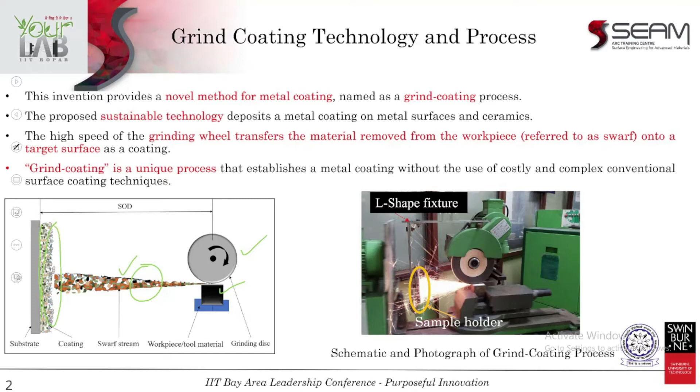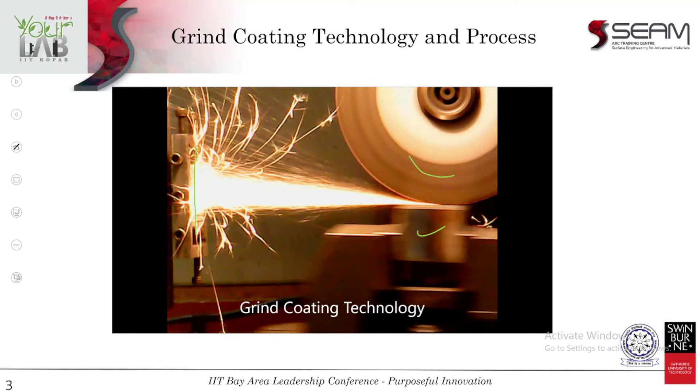So this is a small video about this invention, where the swarf particles are being generated which are then transferred at high velocity onto this surface as a coating. So this high velocity is provided by this wheel, and these particles which were earlier waste, now they are getting deposited as a coating.

Some salient points about this invention. This current invention or the process is very novel. No prior study on such a coating technique has been reported earlier. But if we see, the competitor is thermal spray technology. In thermal spray technology, we use temperature and velocity to propel the particles towards the substrate. But the problem there is that you can't use the waste particles.

Secondly, it's very costly. Thermal spray technologies are very costly and state of the art. There you have to invest a lot of money. Whereas in this case, we have a very simple setup, as simple as a grinder, which has to be retrofitted to give the advantage. So it's very economical in that sense. And another thing is that it can coat ceramics, even such as glass. Of course, this is a green technology.

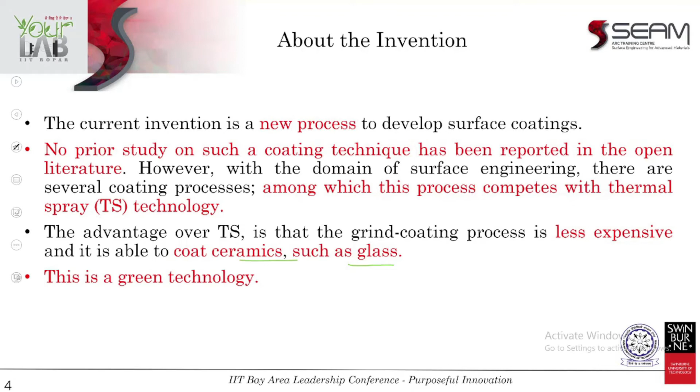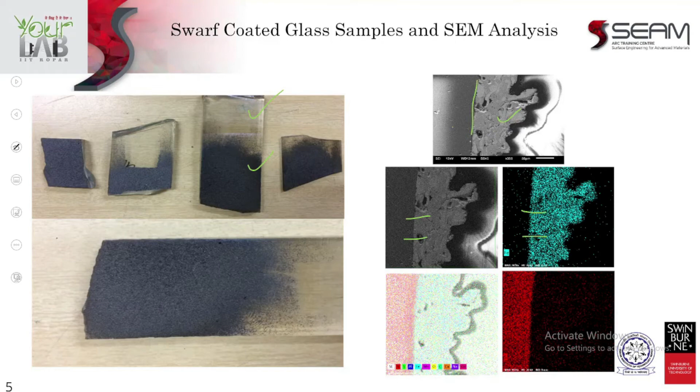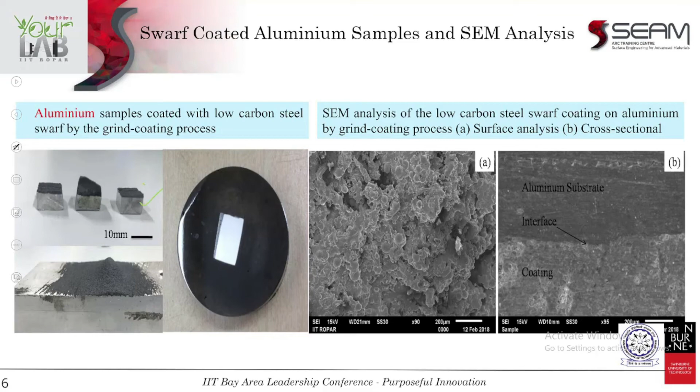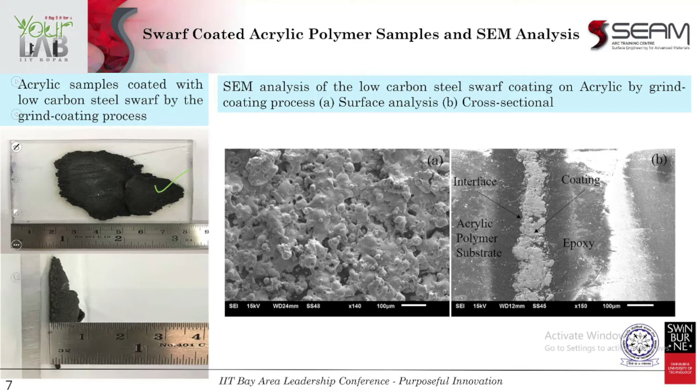These are some more different types of samples where, in this case, aluminum has been coated with a very thick coating of mild steel. You can see this. And similarly, this is acrylic polymer which is being coated with mild steel again, and you can see nice interfaces and microstructures. This is the way we have optimized this process for several material and coating combinations.

So this is one for our glass substrate, and one of the major parameters is standoff distance. So this has been optimized in this case. So this way we have done extensive work to optimize this process for several coating and substrate combinations.

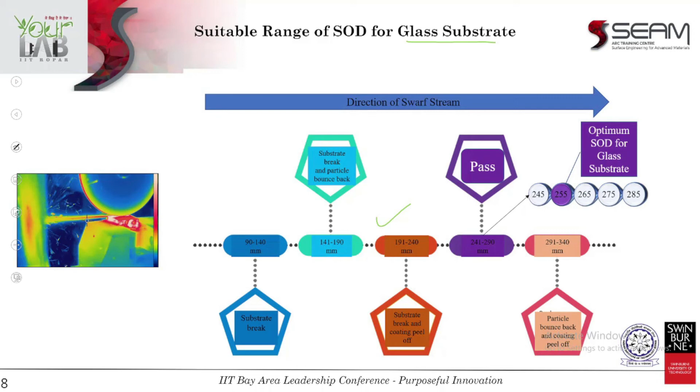Talking about the potential applications, we can develop coatings on soft or hard substrates, see the flexibility, or a combination of both. Second, metal coatings onto glass, which can be for selective opacity, for decoration, or for some engineering functionality, such as in solar panels. Remanufacturing and repair of defective components is another interesting application of this technology. And of course, filling of molds and cavities for substantial build-up can be achieved.